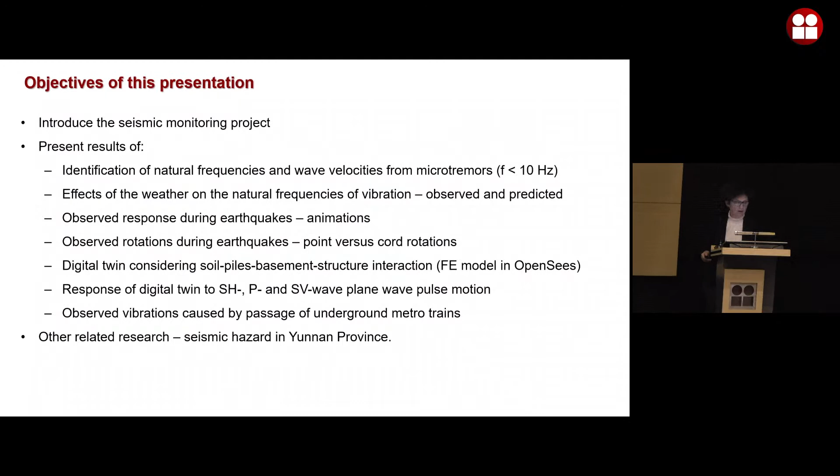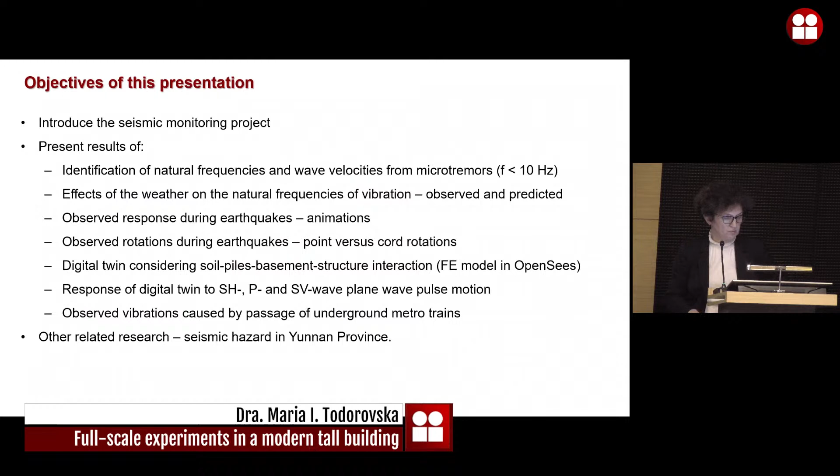First, I'm going to introduce the seismic monitoring project that I installed there, and then present results of different topics we've worked on using this data, or that were motivated by this full-scale observation site, such as identification of natural frequencies and wave velocities from microtremors, effects of weather on the natural frequency of vibration, observed and predicted effects, and observed response during earthquakes. I'll just show a few animations. Then observed rotations during earthquakes, focusing on point versus chord rotations, and then the digital twin that we made, which considers soil, piles, basement structure interaction. It's a finite element model in OpenSees. Then I will show a response of the digital twin to pulse wave motion at an angle, and discuss observed vibrations caused by passage of underground metro trains.

So first, introduction of the seismic monitoring project. It is a skyscraper located in Yunnan province, in its capital Kunming. It's a 50-story building with a 4-story basement, on pile foundation that reaches 50 meters deep. It's a concrete steel construction. Resistance to lateral forces is provided by an integrated system of concrete shear walls and columns connected to RC coupling beams.

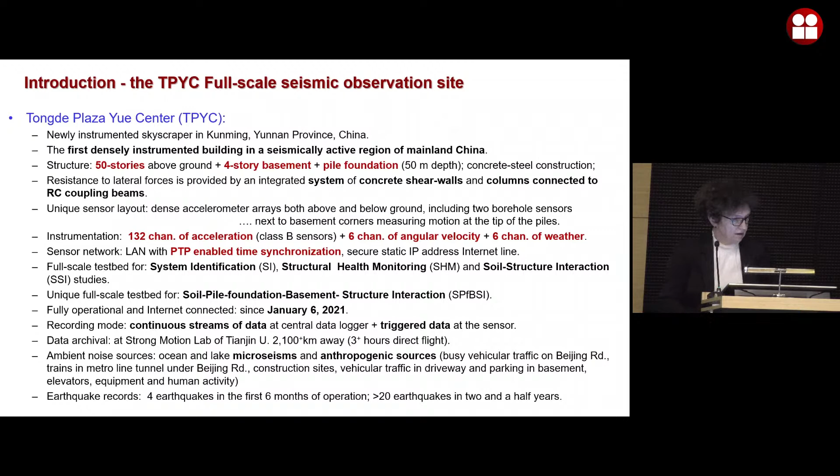There are 132 channels of acceleration. These are class B sensors, plus 6 channels of angular velocity - this is R2, an angular velocity meter - and a 6-channel weather station. Everything is connected. The purpose of this site was to provide data for research, so it has nothing to do with the government. The university provided the money for me to do this; it's totally separate from government projects. It's supposed to serve as a full-scale testbed for studies of soil structure interaction and structural health monitoring, and other studies. So let me show it.

We see here the map of China. My university is in Tianjin, very close to Beijing - it's a port city. And the building is located at the other end of China, diagonally, in Yunnan province, which bounds...

Okay, I'm trying to see that, but okay, maybe, yeah.

This slide shows the map of China. The green rectangle shows the location of the university where my lab is, and the red dot shows Kunming, where the observation site is, because there is high seismic activity. Yunnan province to the north is Sichuan, which is very seismically active. To the west is Burma, and it's in the diffuse zone of the collision of the Indian plate under the Eurasian plate, in a band with complex tectonic activity. I've been fortunate to record earthquakes already in about 2.5 years of observation.

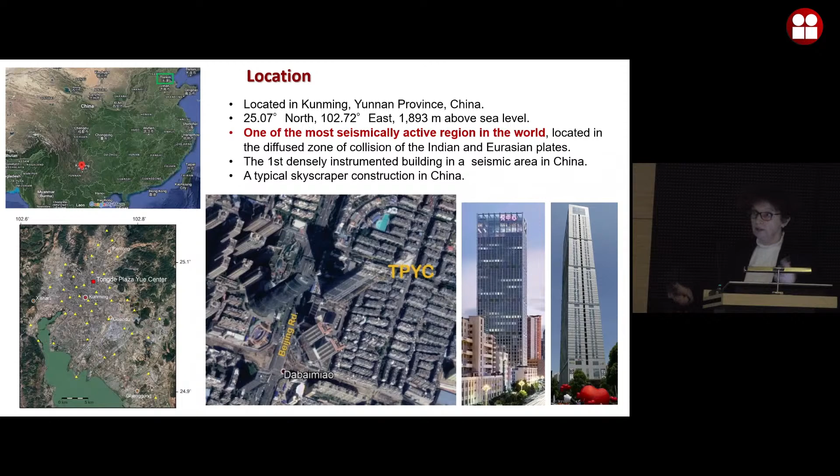This shows a map of Kunming, actually a part of Kunming. It is by a lake, and the triangles here are stations of the Yunnan Strong Motion Network. They have about 250 plus stations in Yunnan, and about 50 are in Kunming, which provides opportunity in future to study the arrival of waves that excite the building.

Okay, so this is a Google map. This is the building, and this is another building by the same owner. I have colleagues in the Yunnan Earthquake Agency, the local government agency that does everything, like the US Geological Survey in the United States. So they found a building for me. Oh my God, sorry about this.

Okay, so the building is pretty regular, rectangular, and detached, which is fortunate, because attachment of, let's say, shopping malls adds complication in the interpretation of the already complex real-life phenomena.

This here is Beijing Road, a busy street, under which there is a metro station, so there are a lot of vibrations from the traffic here, and also from the metro. Here is a metro station, maybe about 200 meters from the building, and the metro goes about 15, 20 meters from the basement of the structure.

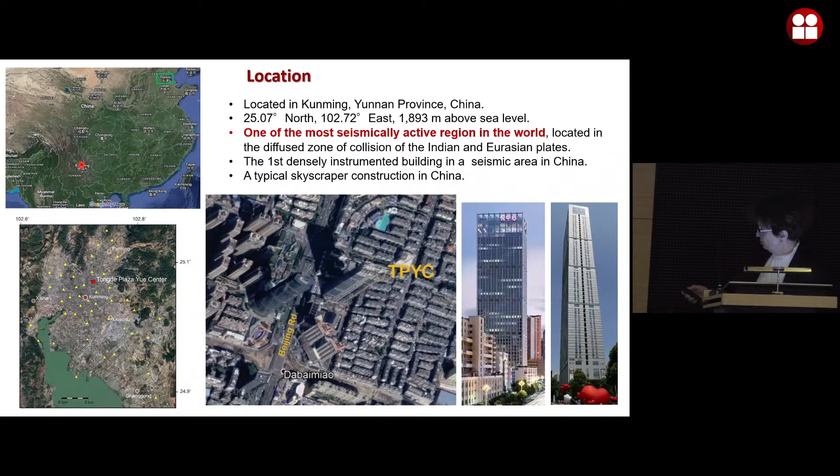Okay, so it has 50 stories, a 4-story basement, and piles. This shows the vertical elevation and the location of the sensors. The unique feature of this monitoring project is a dense instrumentation of the basement by triaxial accelerometers. We have 14 at 2 levels of the basement, and the purpose is to see how the basement and foundation deform, because the building is excited by seismic waves that go through the foundation to excite the building.

A unique feature, maybe even more rare, is 2 borehole arrays installed very near the basement, going down to a little bit less than 50 meters, where the tip of the pile foundation is.

Okay, so the sensors are triaxial class B MEMS accelerometers made by Canterbury Seismic Instruments, based in New Zealand. The angular velocity meters are R2 by eentec, a Lithuanian company, adapted to be compatible with the recording system so we get all data synchronized. The weather station is Vaisala, an industrial quality station made in Finland. So it's a truly international project, and we have a state-of-the-art network that...

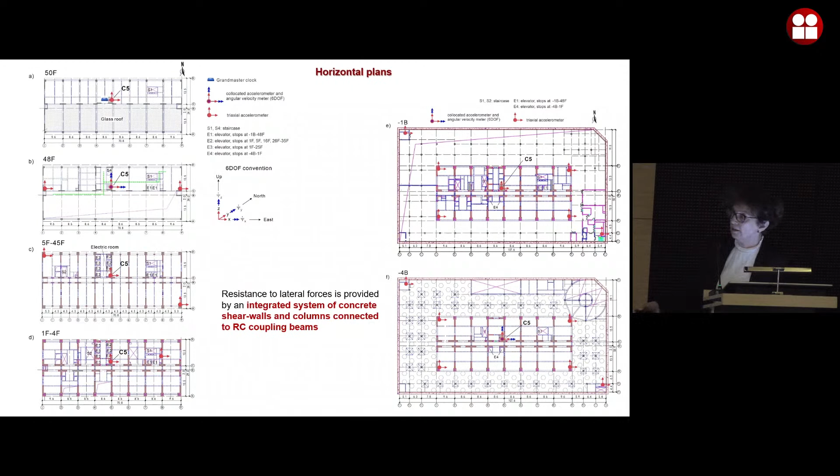So at every 10 floors we have sensors along the diagonal. These are refuge floors that belong to the owner. The rest is a business building, so floors have been sold to businesses, and we could only put instruments where the owner allows it, right?

At the other floors, in between, at every 5 floors, there is a sensor at some distance, not at the diagonal, so we can get torsion at every 5 floors.

And this is the configuration in the basement. So this is the tower, going from the 4th basement up, and it's surrounded by the basement proper, which is a more flexible structure.

Yeah, okay. So this here shows nicely the... oh my God, sorry.

Okay, so the borehole is about 8.9 meters from the foundation, and the other one is only about 1.7 meters from the basement. The metro is on this side, so we record the metro signal by the northwest borehole array.

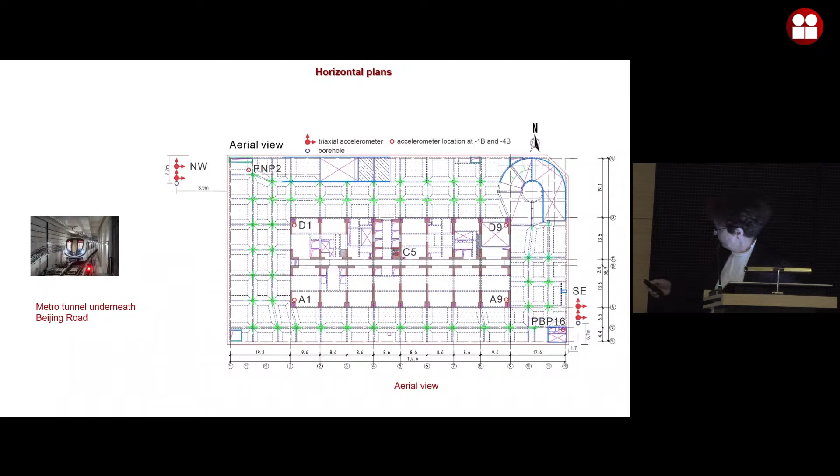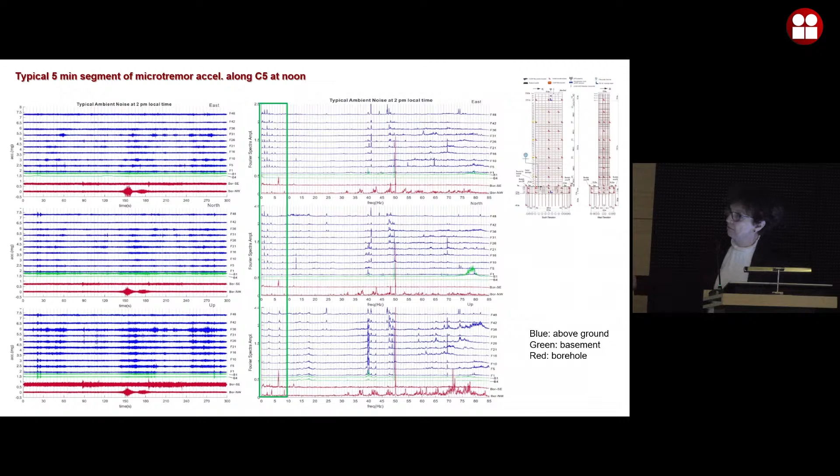And this is the Fourier spectrum. Up to 10 hertz, we see the modes of the structure in which it responds as a whole. Then we see other peaks between 35 and 50 hertz, and based on a model, these are vibrations of the slabs. We see other peaks there which we don't know what they are, some local vibrations.

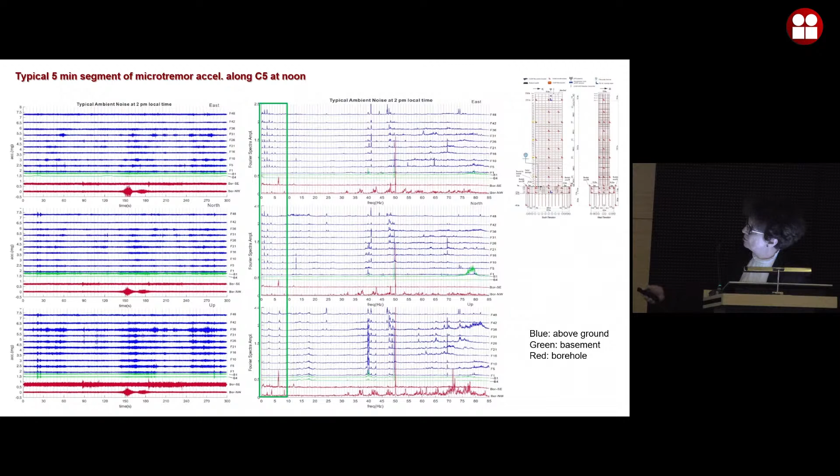This is the borehole on the other side of the building. We see frequency at about 2 hertz, 7 hertz, and we believe this is some construction site. This signal is the train. The train signal has equally spaced clusters of peaks, which are very intriguing. These are the 3 components: longitudinal, transverse, and vertical.

So now identification, first to see where our modes are, using microtremors. The origin of microtremors are microseisms caused by ocean waves in the Indian Ocean, and also by waves in Lake Dianchi, which is very close, the closest point to the shore being only 5 kilometers. These have been documented; seismologists have studied the microseisms caused by the lake. We also have very rich urban noise, as I mentioned.

Initially in November 2018, we did an ambient vibration survey using mobile sensors, ETNAs, that my colleague borrowed us. Then we identified the building again in 2021 using 1 hour of microtremor data stacked, and compared the results to see possible change due to deterioration of the building. My student made an ETABS model of the fixed base structure, which helped identify and interpret these modes.

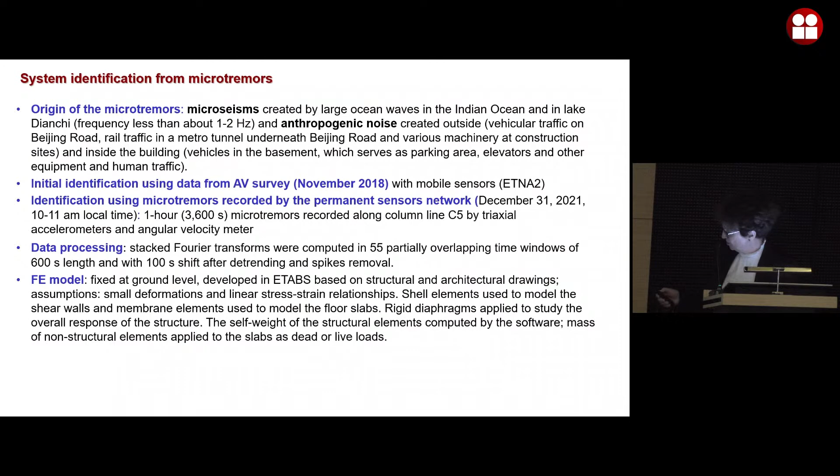So these are results of the 2018 survey or campaign, as they call it in Mexico. We recorded microtremors at all locations where we have sensors, but there was construction work in the building, so we could practically only use the record at the 48th floor and at the basement, which were quiet.

So we fitted a uniform Timoshenko beam, and what we see here are impulse responses obtained by deconvolution with the record at the 48th floor. One of the lines was obtained from the observed microtremors, and the other line is from the fitted model. These here are transfer functions, observed and of the fitted model.

From the ratio of frequency, we see that in the longitudinal direction the building is practically like a shear beam, while bending is considerable in the transverse direction. These are the torsional peaks as well. The Timoshenko beam model accounts both for bending deformation and shear deformation, and the wave propagation is dispersive.

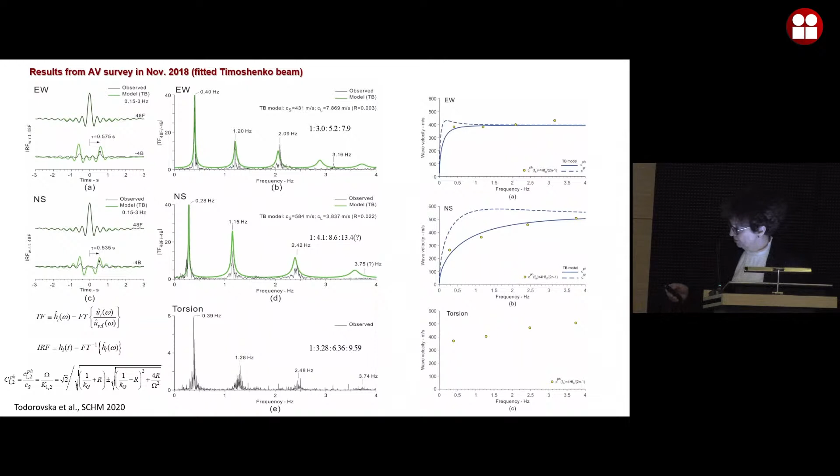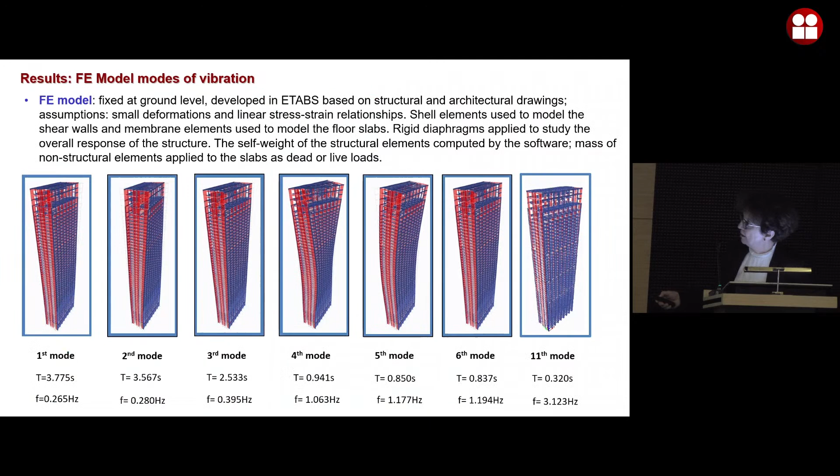Regardless of the noise, we compare with the model, and the model was very useful. We could identify the vertical frequency peak of the vertical motion near where the finite element model predicts it. These are the modes, so I'm just going to skip them.

You've seen many of them. These are RMS values and peak values recorded along this central line. We see that the boreholes are the busiest place, actually, down at 50 meters. And these are RMS values and peak values recorded by the two rotational sensors.

So we see that for the torsion only, we have amplification towards the roof caused by the building. Otherwise, we have larger motion at the boreholes, I mean in the basement, than we have at the roof.

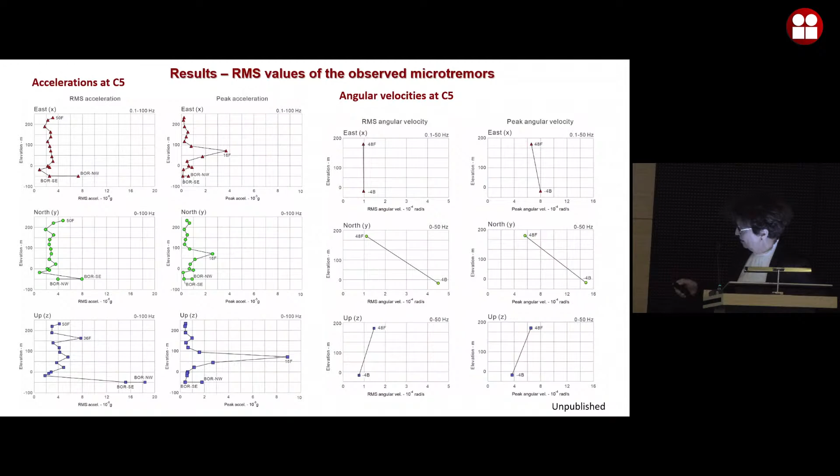These are Fourier spectra of the accelerations, x, y, z. X is longitudinal, y is transverse, and z is up, and these are the rotational sensors. We see clear peaks, even in the rotational sensors, and this peak corresponds to the lateral modes of vibration. And this is the torsion. We could see 3 torsional peaks, actually.

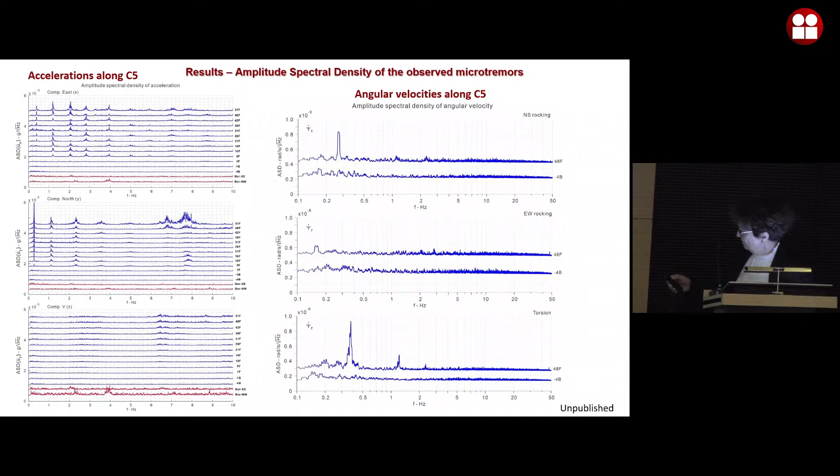These are the transfer functions in which we see clear peaks, and torsion is close to some of the lateral peaks. The torsional sensor helped us identify and separate the torsional motion. This is just first-hand interpretation and analysis.

We now use the stochastic subspace identification method to find the modes. These here are the vertical modes, and the vertical is very interesting because most buildings only have horizontal sensors, and if there are vertical sensors, they're only in the basement. We identified the first vertical mode at about 3.2 hertz. These are also vertical modes, quite prominent.

Why is this significant? Vertical motions are rarely even measured or considered in design. They have smaller amplitudes compared to horizontal motion, except near the earthquake. But that is true only sufficiently far from the earthquake. And another perception is that vertical frequencies are very high, where ground motion doesn't have much energy, but for such tall buildings, the fundamental vertical mode is at 3 hertz, which is where ground motion actually has energy.

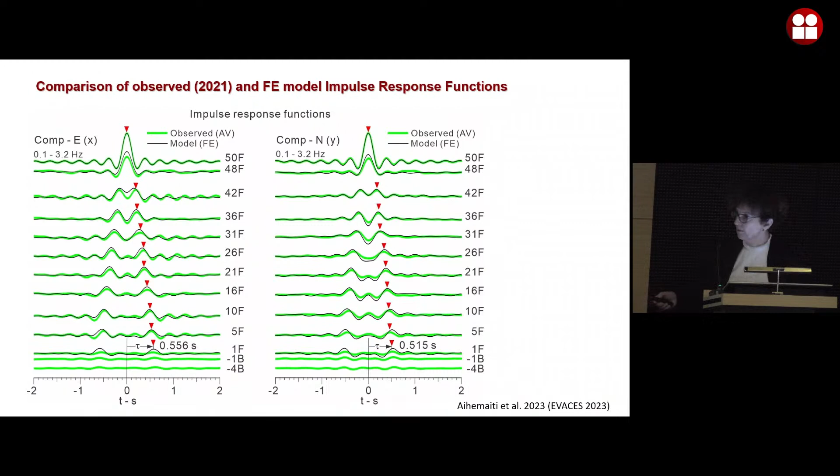This here shows the peaks, so I'm going to go fast. These are from 2021 data, the model impulse responses and the observed impulse responses. From 1 hour of ambient vibration data, we can get very nice shapes, and travel time is about half a second from roof to the ground.

Here we compare this with results measured in 2018, and we see up to about 2.5% difference. For the torsion, maybe there is inaccuracy in reading which contributes to these measurements. But these differences are of the order of magnitude of effects of weather, temperature, and effects of nonlinearity, recoverable nonlinearity, depending on the amplitude of the response.

So we decided to study these effects. The weather in Kunming is mild because it's at 25 degrees latitude, but it's at 1,900 meters altitude, so the summers are not very hot.

The summers are the wet season, it rains heavily, and it's one of the rare places I've been where one doesn't need air conditioning in July. In winter, temperature rarely drops below 0 centigrade. The springs have strong winds, and summers are very wet.

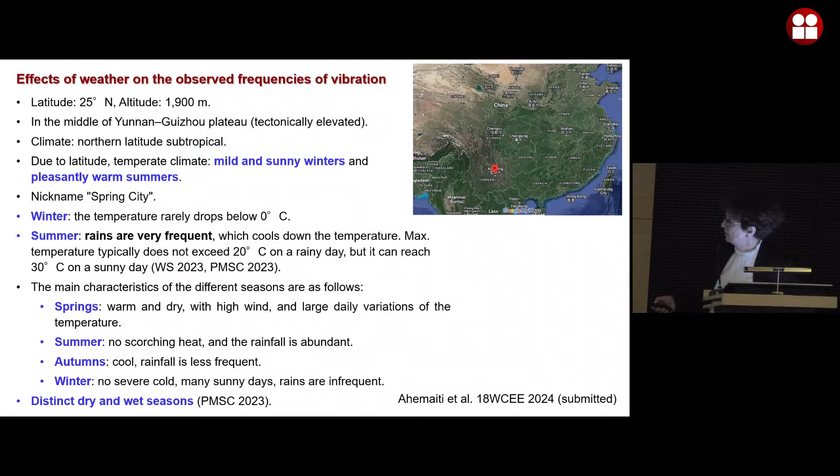So the climate is characterized by two distinct seasons, wet and dry. We believe that rainfall would have an effect on the frequencies of vibration. These are results from a paper that I just submitted for the World Conference next year.

We present preliminary results. We only analyze the east-west component in the first 4 modes. We use the stochastic subspace identification method to more precisely identify the frequencies, because we look for very small changes. We use data only from 2 sensors, simply to see first what we have, and then we'll do more detailed analysis.

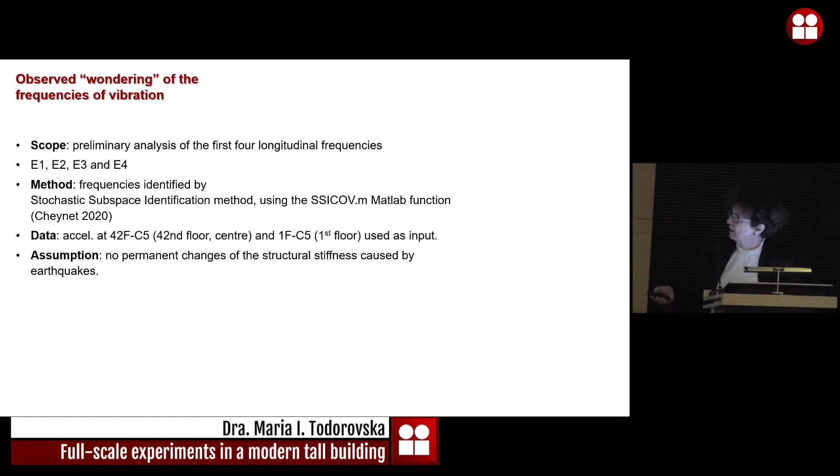There have been probably around 30 earthquakes recorded so far, 26 until last May, and 16 are kind of very nice records. But they were far; the largest one was a magnitude 6.4 at 300 kilometers.

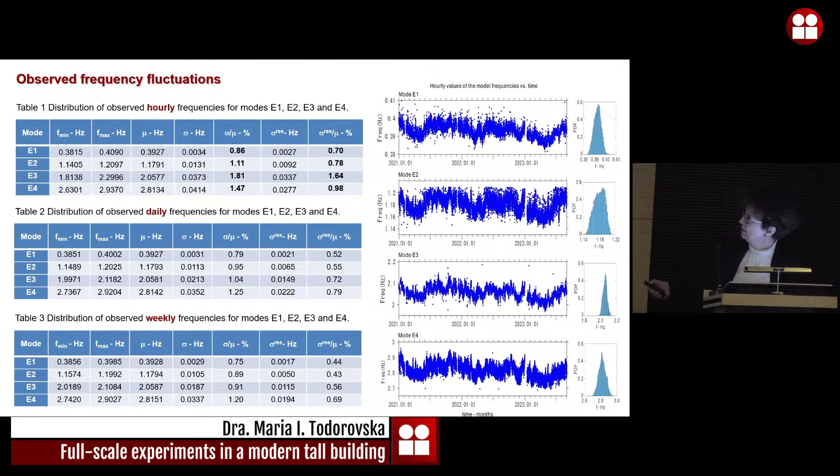So sigma over mu is the coefficient of variation of the observed values, and sigma residual over mu is the coefficient of variation of the residuals. We see the observation has about 1 to 2% variation, and the fitted model has less variation, so we do correct to some degree.

There are 3 tables because we did analysis for hourly values, daily values, and weekly values. The scatter is much smaller for the daily and weekly values. But if you want to take into account the effects during particular time of day, we need good prediction for the hourly effects.

So here we consider temperature, wind speed, absolute humidity which we get from the recorded relative humidity, and the rainfall intensity. These are the weather components that we consider.

Here we see the temperature, the RMS value of acceleration at the 42nd floor, then the wind speed, the humidity, and the rainfall intensity. Because wind speed is closely related to the RMS value, we use the wind speed.

Here we have a break in data after some storm. We were so focused on the boreholes and contacts that we forgot to monitor the health of the Vaisala station.

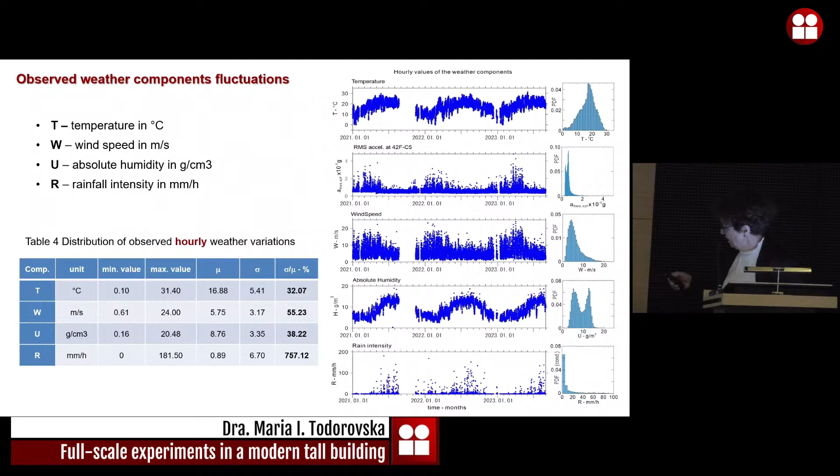So we fitted a linear model: constant term, wind speed linear, T is the temperature linear, so all linear. And we see the 3 tables are from hourly, daily, and weekly values.

We see here that the temperature coefficients are all negative, and by controlled experiments in narrow ranges of the weather parameters, we see that the frequency decays with temperature. This is very much dependent on the structure. Some have found increase of frequency with temperature, and this is for cracked structures. The hypothesis is that expansion of the concrete material closes the cracks and stiffens the structure. But this is a new building, and we see what could be expected from the properties of the material.

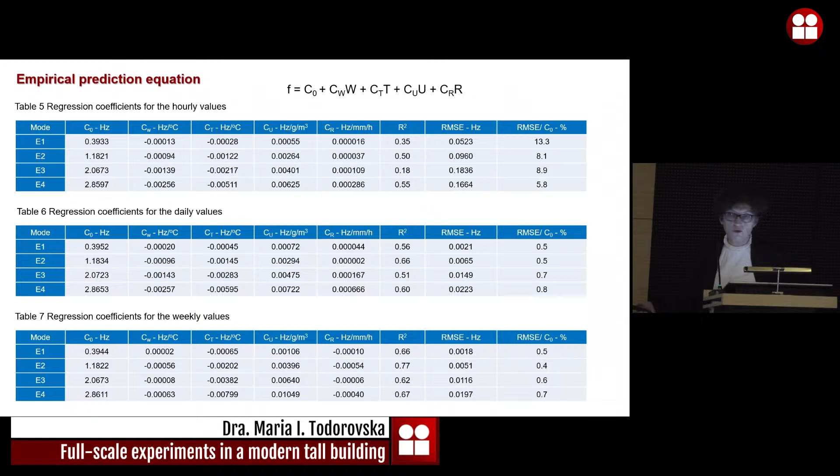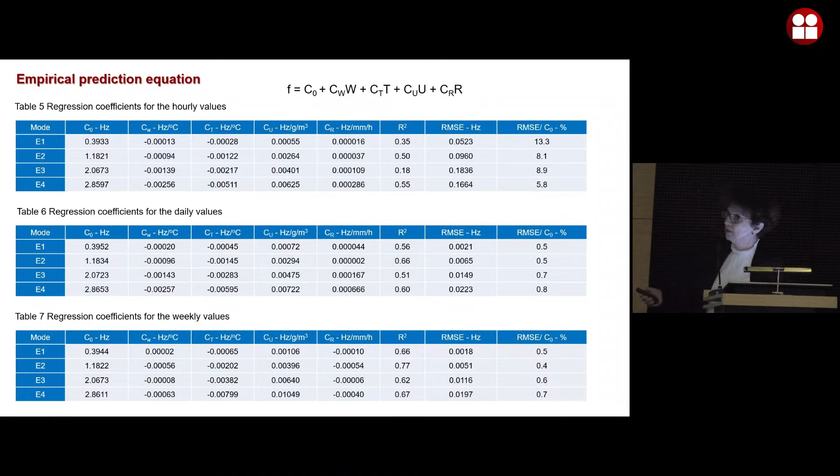The coefficients are positive for the rainfall and humidity. For the rainfall, there is a hypothesis that I have actually shown on a model that produces effects of the same magnitude as those observed in Millikan Library and other structures, which is increase of frequency by heavy rainfall caused by swelling of the soil, and could be explained by representing the soil as a fully saturated poroelastic material.

And we need to refine the model, maybe do some quadratic terms. We account for phase delay of the temperature effect, because we measure it outside, and it comes to be 20 hours, order of magnitude delay.

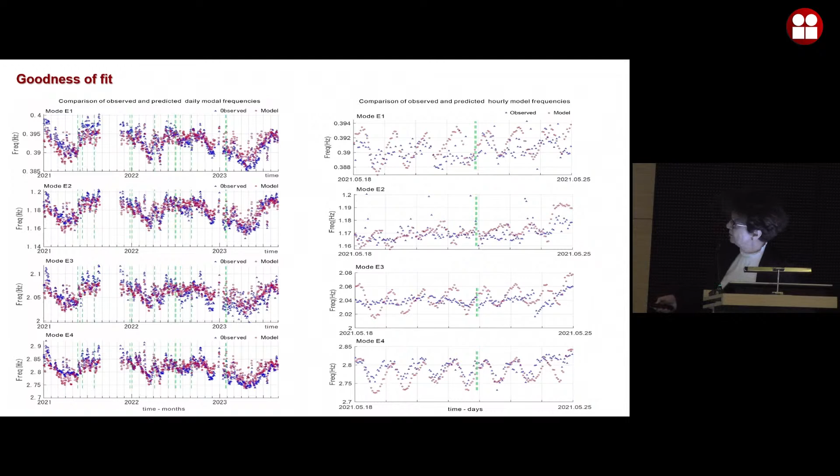These here are the daily values, and they don't look good except for the fourth mode. So for the fourth mode, with some refinement, I think we will be able to fit closely the observed variations, or to correct for the effects of the weather.

So we think that in future we can actually get better results to correct for these effects.

So why are these important? These are small changes, but if we want to use sensors to detect small, hidden, and localized damage, they would produce small changes. So we need to know first if these changes are due to the weather, or due to change of stiffness. The prediction of this effect will actually improve health monitoring using ambient data before the earthquake and ambient data after the earthquake.

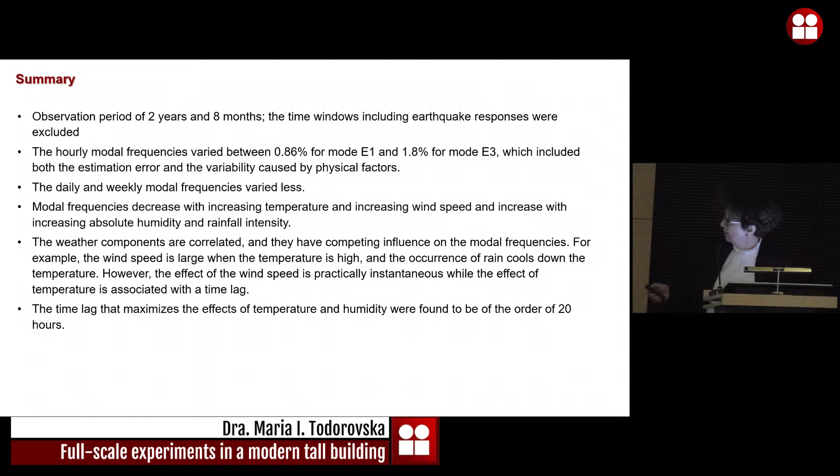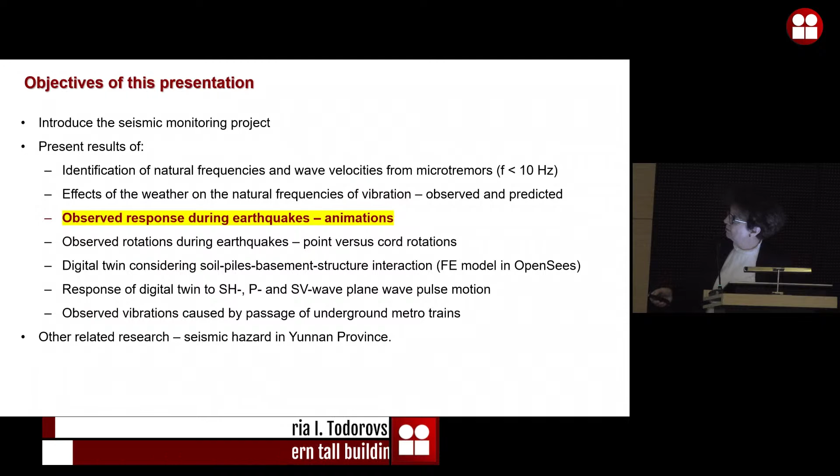Okay, so let's see what do we have. Changes are small in the prediction, which reduces the scatter. So now let's observe the response during earthquakes.

Okay, so let's see, I'm going to try. Now, how can I try?

Oh, my animation doesn't show. Anyone know how it can show? Yeah, this happened actually at a conference, and only some people knew how to solve it. No, it doesn't show. Okay, there is something. Let's see what to do.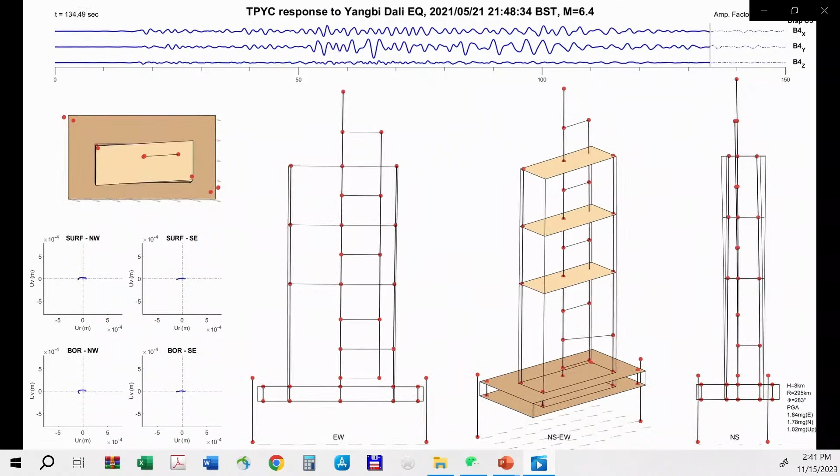Actually, there has been a magnitude 6.4 recorded not too far from the building. And the building is torsionally flexible. So the first torsional mode has lower frequency than the transverse mode. So a lot of torsion. And I think this is interesting that we see the building moving vertically as well.

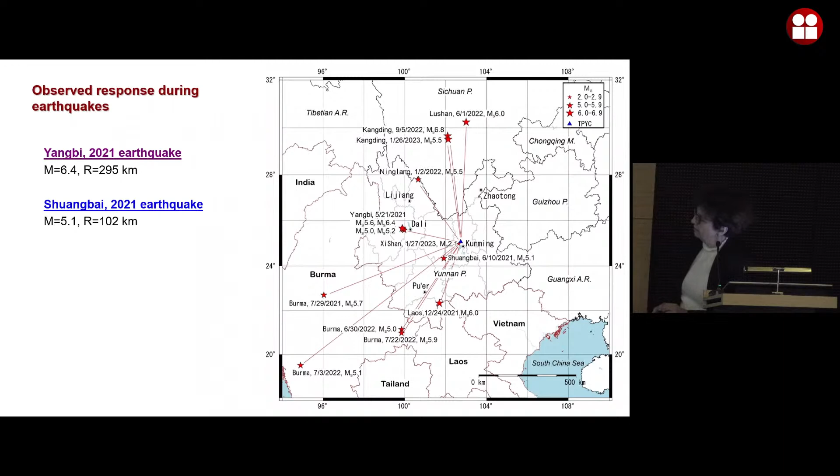Okay, so how do I get out of here? Oh, I have another one. So I want to run this one. Okay, double click on that one. No, just say yes, right? Okay, yeah.

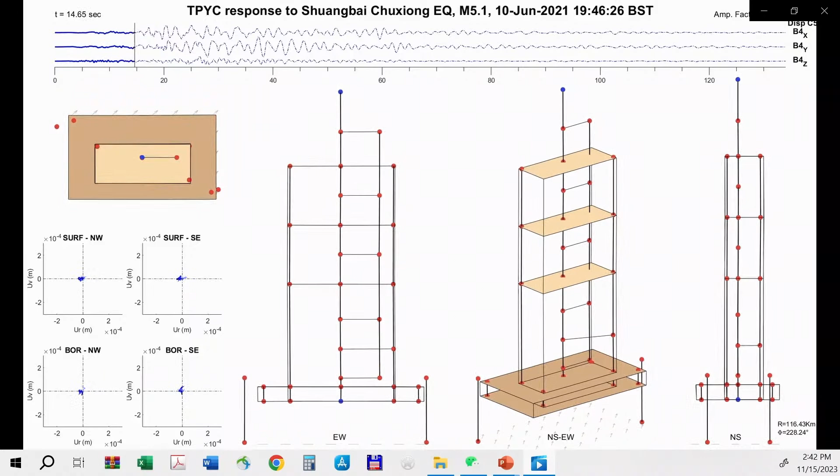Okay, so this is Shuangbai, 102 kilometers away, magnitude 5.1. This one has more high frequencies. And the arrows here show the direction of arrival of the waves.

And we have an earthquake at 10 kilometers epicentral distance, magnitude 2.1, beautiful signal. Vertical motion is back, the bottom. The bottom is the vertical, right? B4Z, this is in the basement, lower basement.

Okay, so can you please put it back? I think now it's not so interesting.

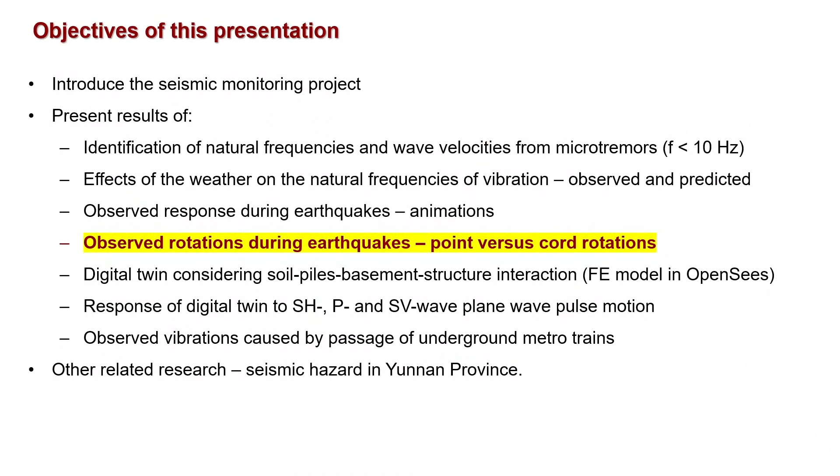Okay, so next is observed rotation during earthquakes. And this is from a paper, an invited paper for the keynote lecture of the rotational seismology and engineering application session at the World Conference of Earthquake Engineering next year.

Let's see. So motion of an infinitesimal element of soil is described fully by 6 degrees of freedom, described by 3 rotations and 3 translations. We record only the translations mostly because their magnitude is much larger than the rotations. But the rotations are not insignificant in the near field of an earthquake, and they may contribute actually to damage and maybe even collapse of a structure. So it's good to know what these motions are as excitation and then how they affect the structure.

And there is a working group on rotational seismology and engineering application, and Heiner Igel is the leader from the geophysics side. I'm a founding member, but haven't done much until now recently, that I have my own records. So they are not negligible in the near field of an earthquake, and there are papers of observed rotations. Our rotations are, of course, small.

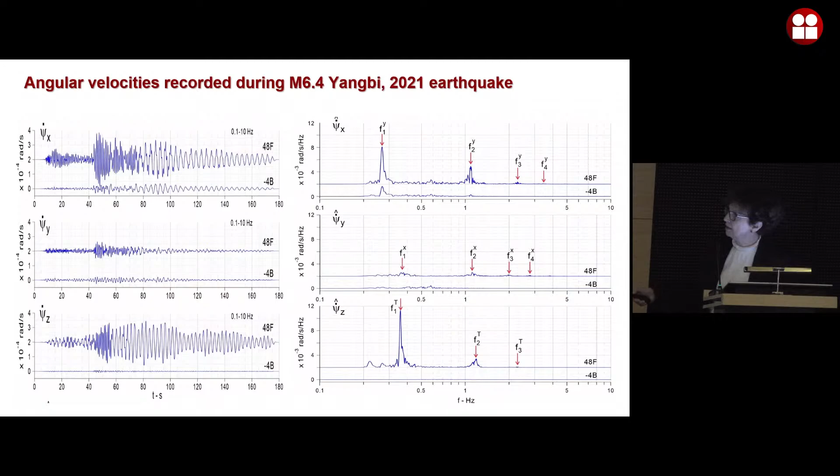So let's see, what do I have here? Okay, so these are the rotations in time. Psi X, these are rotational velocities as they are recorded, right? Instrument corrected. And at the 4th basement and at the 48th floor.

And this is the X component, which is the north-south rocking. And this is the east-west rocking, in which the building is stiffer and it behaves like a shear beam, while in this direction it behaves like a Timoshenko beam. So this motion here is the rotation of the floor slab, basically, because the building as a whole bends.

And it doesn't do that much in the other direction. And this here is the torsion, so we see large amplification actually of the torsion inside the building. And these are the modes of vibration, right, of the lateral motion.

And we see them also in the basement, right? The reason for this is the fact that the basement doesn't move as the soil, as the incident motion, but is affected by the response of the structure, and the mechanism is the soil structure interaction. So we see these peaks in the basement motion. We don't see it as the torsion, so the input torsion is really small, but the rocking actually is more significant. And this is the Yangbi earthquake, magnitude 6.4, that produced the largest response.

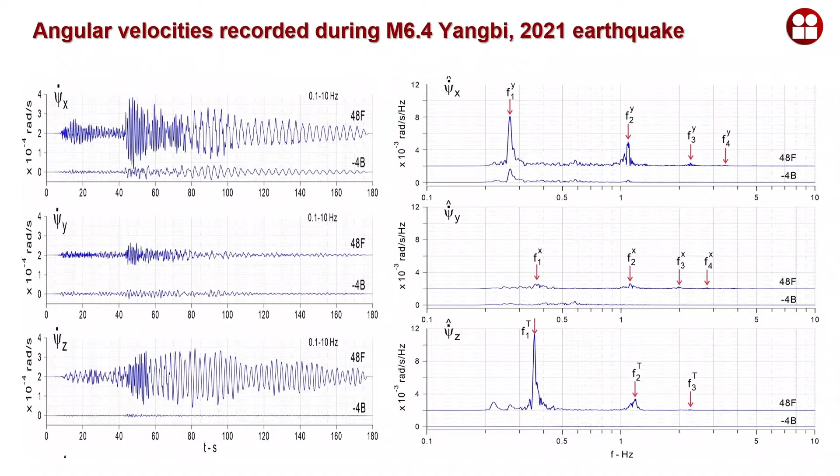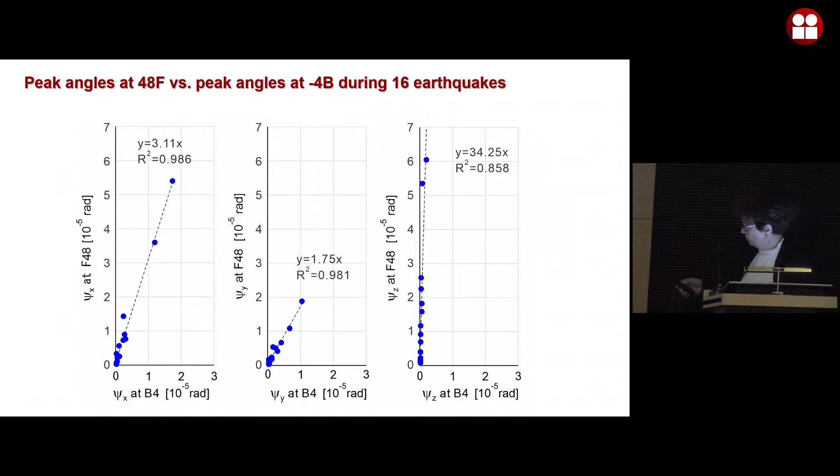And we see this linear trend as observed by seismologists. And this here shows the correlation of the motion at the roof, 48th floor, and at the basement. And we see kind of linear correlation. And we see very large amplification for the torsional motion because this is a torsionally flexible structure.

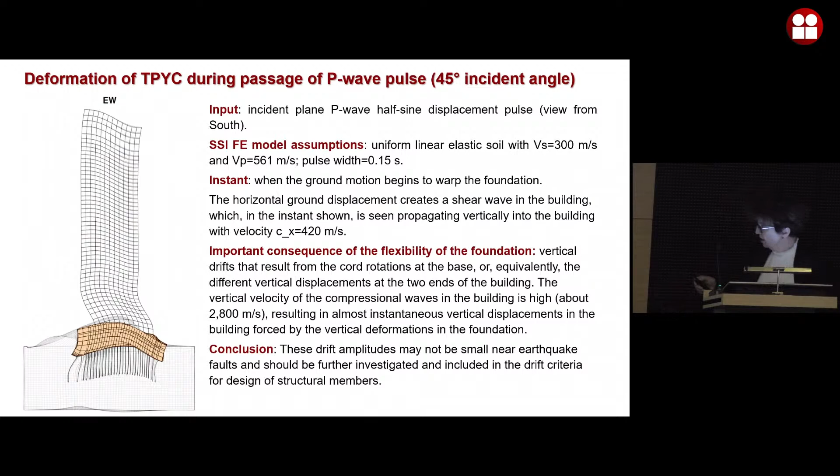So that's about it. Next, digital twin.

My very able student made a finite element model of the soil, 540 meters by 300 meters and 100 meters depth. We have boreholes up to 100 meters at 29 locations just under the building and around the building, so we have a site-specific profile of the soil up to 100 meters depth. I have no idea what's underneath.

So every pile is modeled separately. We consider two variants, one with bond contact and one with friction contact. Friction contact only works on pressure - soil works only on pressure and not in tension. And friction provides a constitutive law of the relative motion of the soil in the structure.

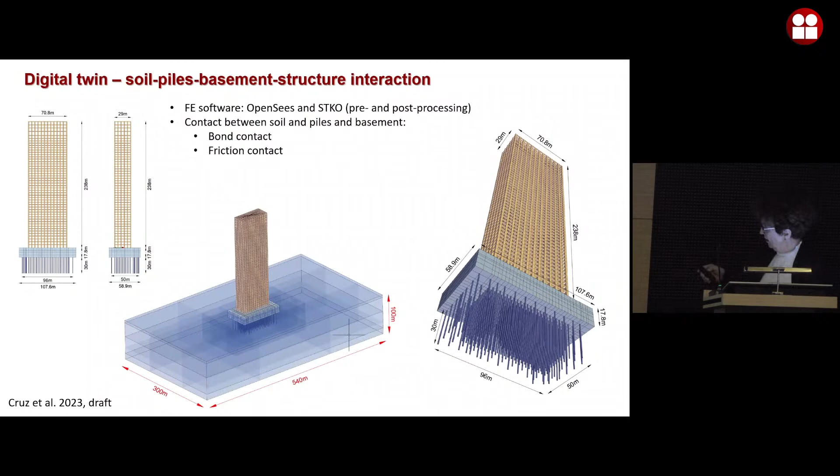So we have results for both models. I got a project to study the role of flexibility of foundation in the response of tall buildings. So my student made models: one fixed basement, another with no piles and flexible foundation, no piles and rigid foundation - this is the assumption in boundary element models, right, rigid foundation and no piles - and then flexible foundation with no piles, and then the full model, which is flexible foundation on piles.

This here shows a plot of how the fundamental frequency changes. This is for the bond contact, and this is for the friction contact, so much more reduction actually for the friction contact. And this here is the full model, at the end.

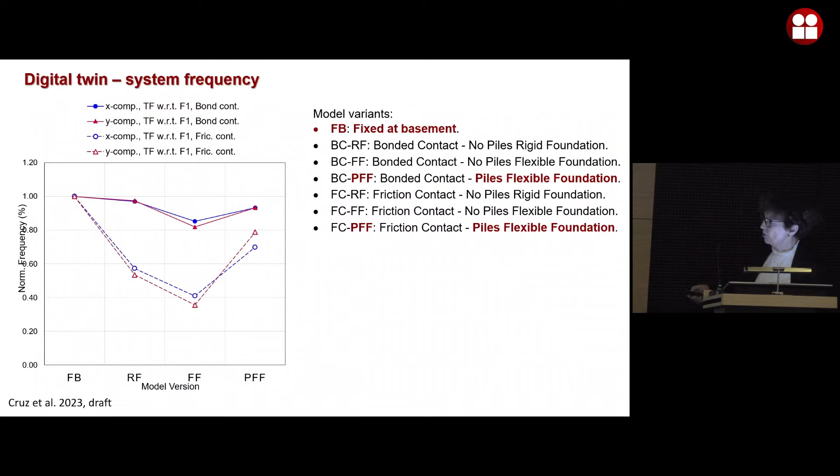So we see about 14% reduction, actually, we account for caused by soil structure interaction. This here is the damping - the damping increases due to the soil. And this here is drifts.

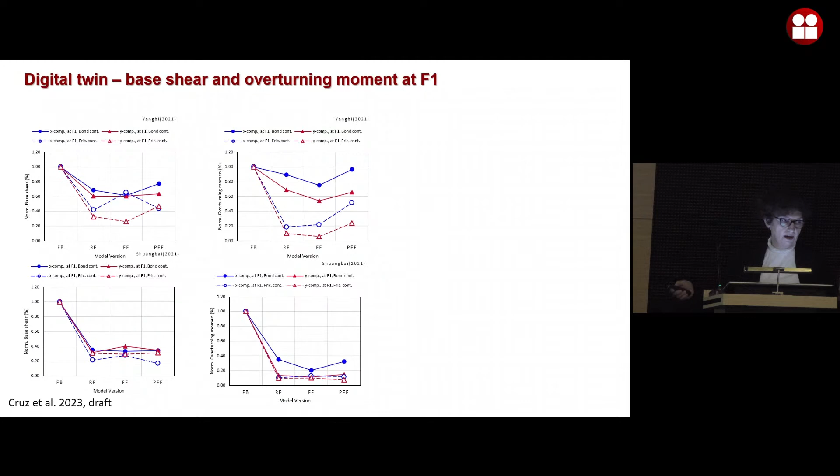I'm going to go fast because I have many slides. This here is the base shear and overturning moment. So basically the idea here is to see how the response depends on our assumptions in the model.

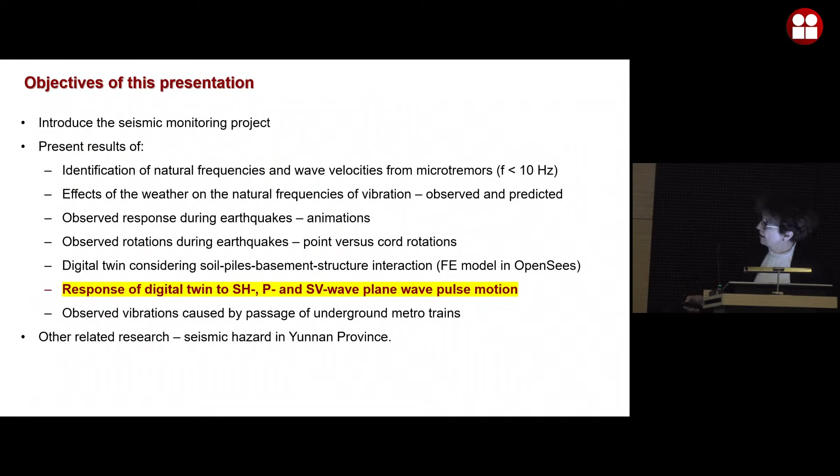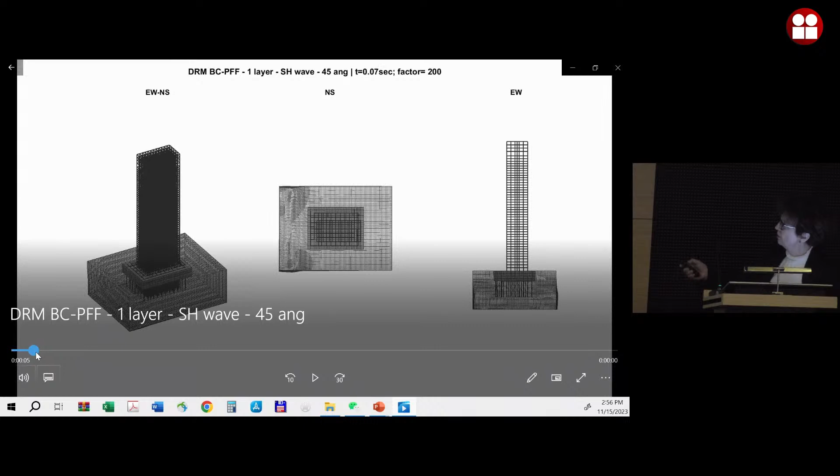So the building is excited by a half sine wave pulse arriving at 45 degrees. First, yeah, the first one, then second and third. Oh, so I cannot control - or I can control here, the cursor - to go slowly. Okay, so you can slide it slowly.

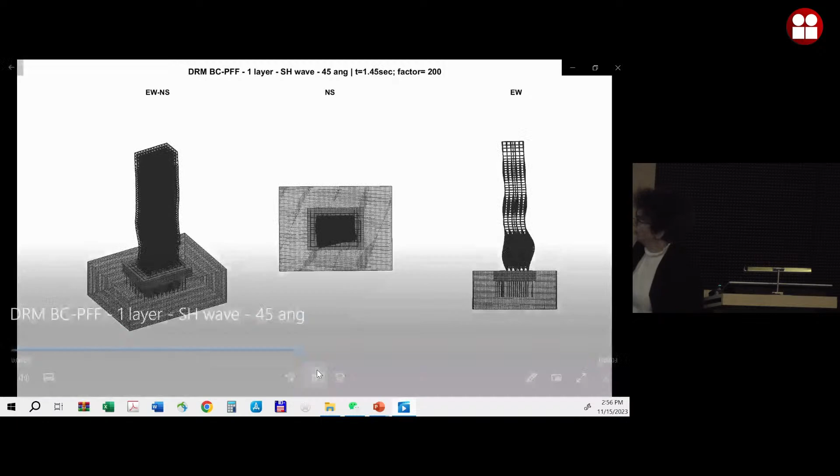So this is an SH wave. Just slide the time from the left. No, he can't see it - it's such an angle. Okay, yeah. So the pulse goes very quickly, but the building vibrates long after the pulse is gone. And this kind of motion excites the torsion.

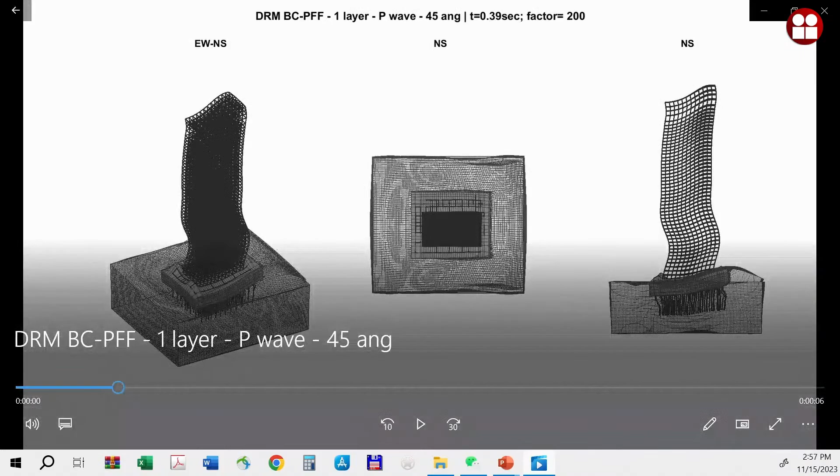Now the second one. The second is a P wave, so it imposes vertical displacements and also horizontal displacements, okay, and it actually warps the foundation. So that was a snapshot from this kind of motion.

Okay, so we can see actually, if this goes slowly, how the wave goes up, reflects, goes down, and then bounces back and forth. This is P wave? That was P wave. Would you like to see it again? Yes, please. Okay, so the P wave, and I can slide it slowly since I can see it there.

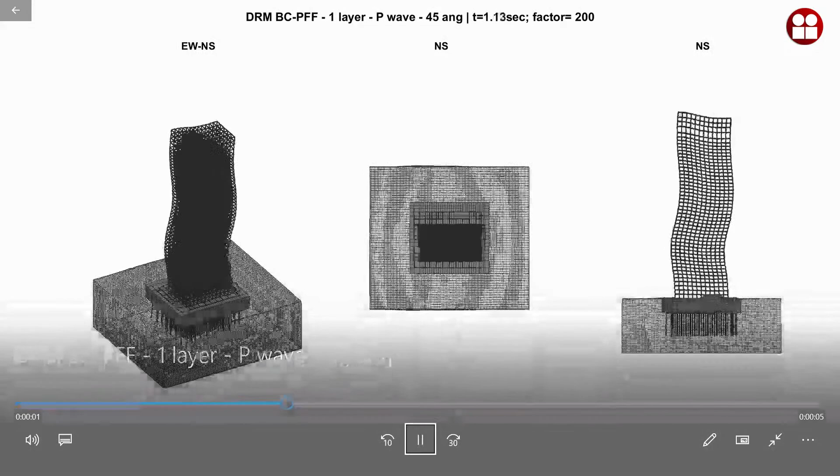You can use actually even the cursor. And my student wrote a MATLAB code that actually plots this rather than using commercial post-processing software, and he can edit them. The files are much smaller. So he's a very, very able student for computation and technology.

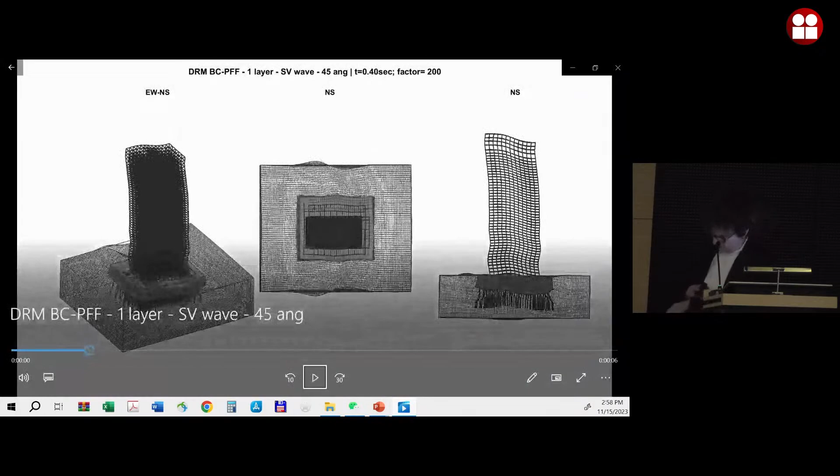Okay, shall we do the SV? Okay, and I can show it to you after, Paco. Who is interested? Okay, so 5 o'clock. Okay, so this is the SV wave, but I think that the P wave is actually kind of neat. And this could be a pulse of near field ground motion, right, very near the earthquake.

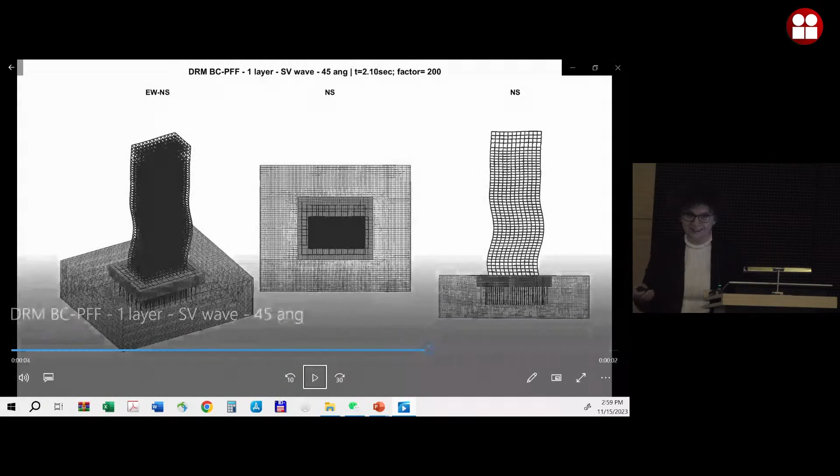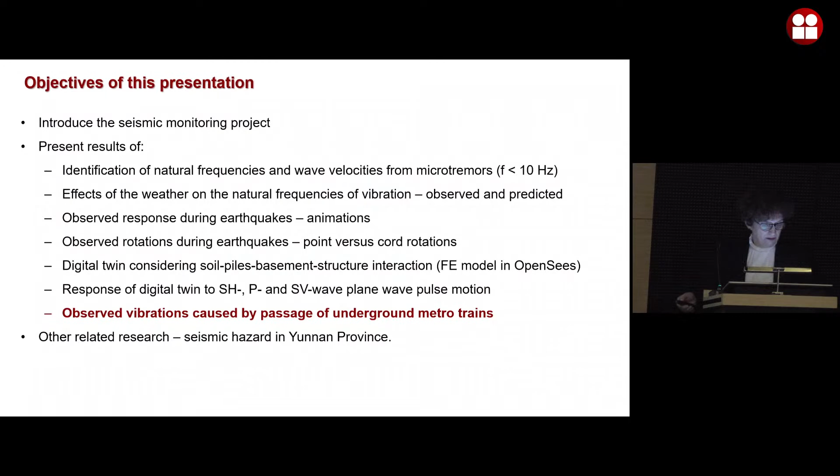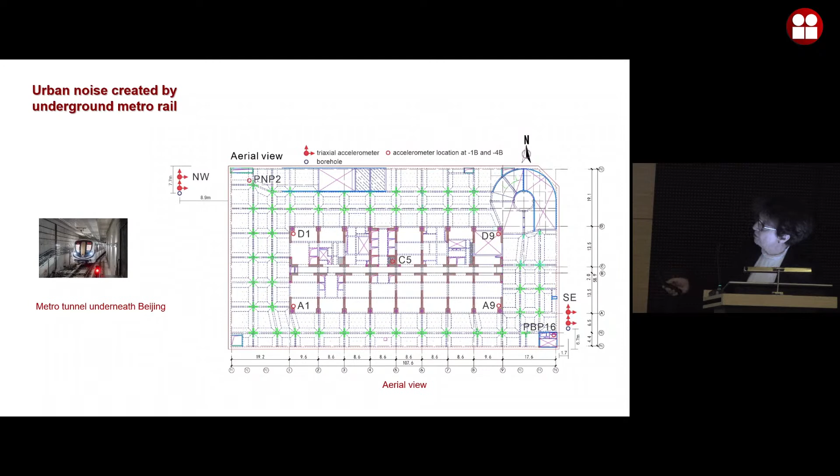So what is this? Okay, now observed vibrations caused by the passage of underground metro trains. As I mentioned before, the metro goes under Beijing Road, and our borehole is very, very near, actually. We don't know exactly where it goes, but supposedly it goes in the middle. This is again the location of the sensors where we see the train passage.

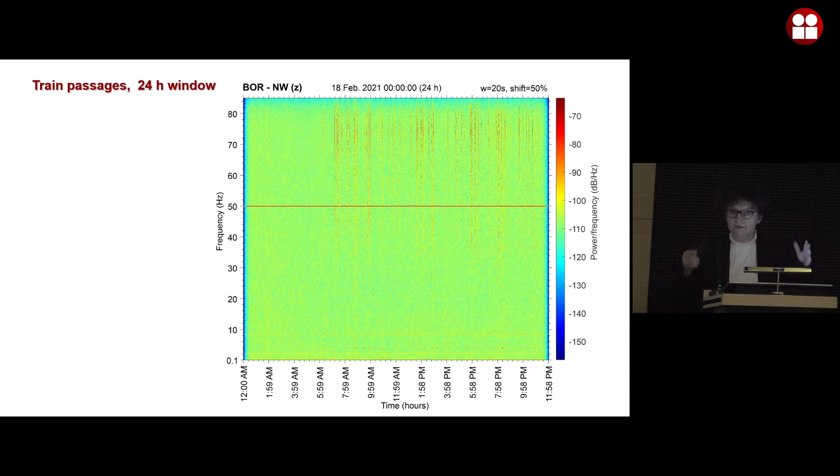This here is a time frequency plot over a 24-hour period. We see the train comes at about 6 o'clock, 6:30. Because China is one time zone, people in the western part actually start their life 2 hours later than the people in the east. So this is very early, even 7. People go to work at 9.

Okay, so these lines are actually passage of trains. And we see these are not continuous lines, and that's because the spectrum has very peculiar peaks. And this here is the 50 hertz frequency that the borehole sensors pick up.

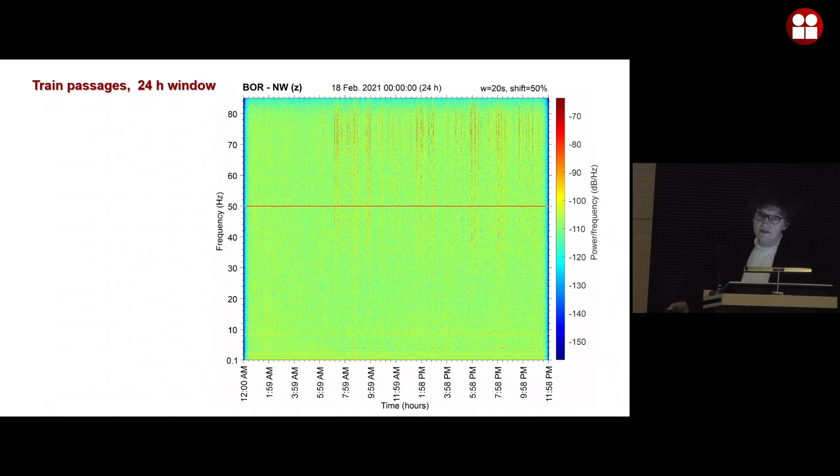Underground is a very busy place with lines because of the metro, etc. This is 24 hours, so we see weak lines and strong lines. The weak lines are the slowing down metro, because there is less force exerted by the wheels, so it's a weaker line, and the strong lines are the accelerating train. So the frequency is really between 35 hertz and up, and this here is the borehole.

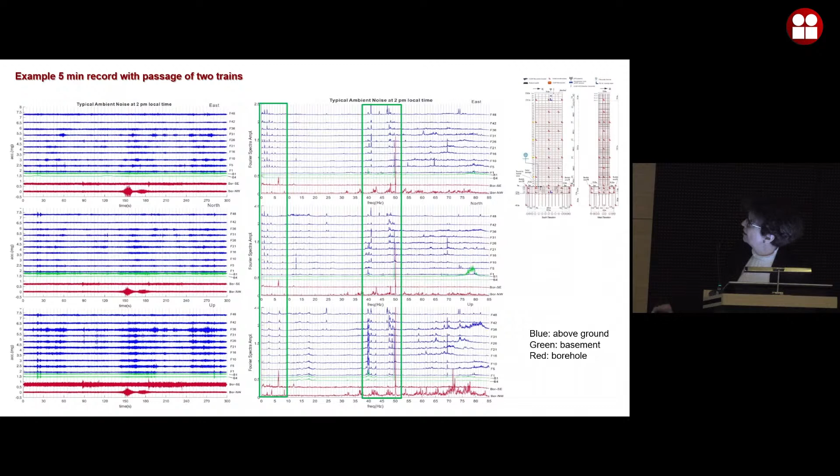the array became operational. So we see here that the slab vibration is actually similar frequencies as the train. And at the borehole, it's very close to that slab where vehicles go around the building. So it records these vibrations as well.

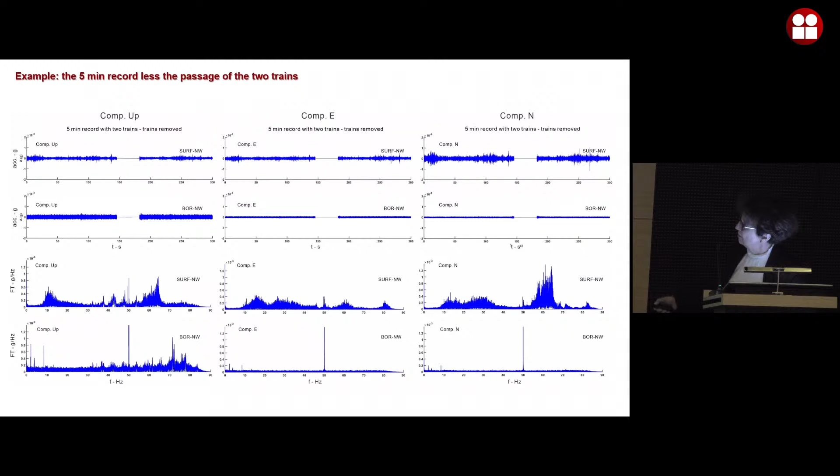Okay, so this here is the combined signal. Two trains, the top is on the surface, right? And the bottom one is at the borehole. So we see the two trains, the whole signal, everything. And we see much larger amplitudes near the surface. This here is that 5-minute record, less the passage of the two trains. We still see large motion, okay. And this here is the passage of the accelerating train.

So this is the vertical, which is actually of primary concern, but sometimes it's useful to look at the horizontal ones. At the borehole, the vertical has the largest amplitude, larger than the horizontal ones, but at the surface, the horizontal ones have larger amplitude because of the amplification near the surface, the free surface effect.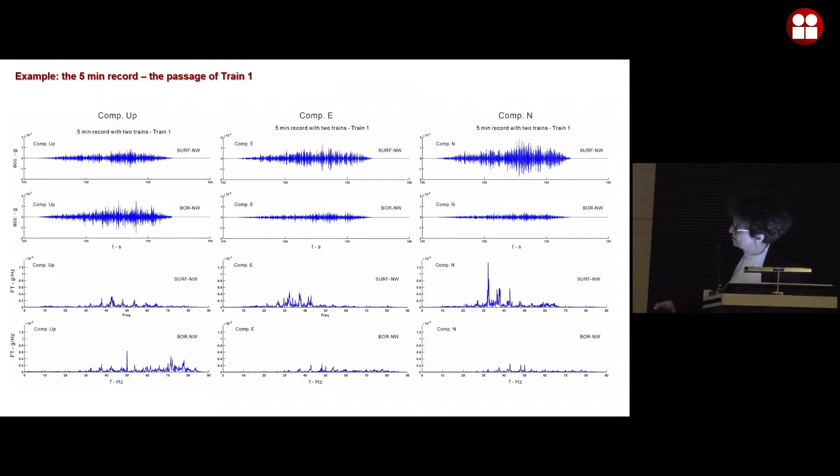And these here are the peaks. We see like equally spaced clusters of peaks, okay, which are intriguing. And this is a record in the borehole at the corner, which kind of filters nicely these high frequencies, so we can measure the clusters nicely. So these large peaks are exactly at 5.2 hertz. There are smaller peaks at about 2.6 hertz, I believe. So there are different kinds, I think these are different superimposed effects.

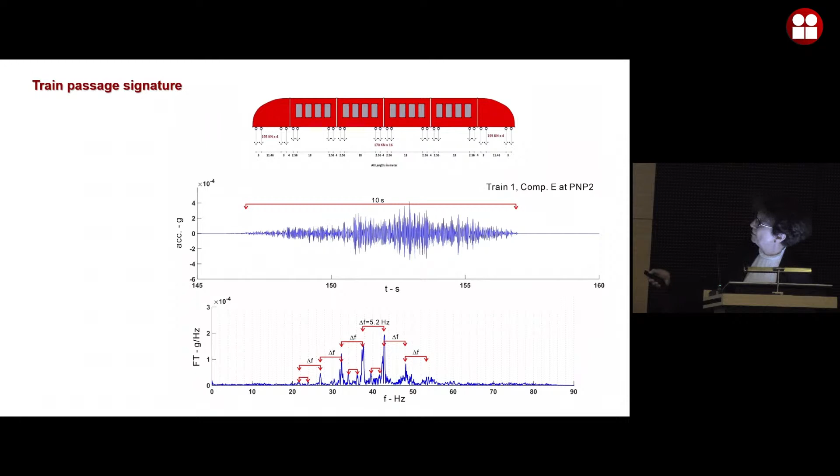And what causes this? The 5.2 hertz can be explained by the action of this bogie. So each car, these are passenger cars, has two bogies in front and in the back, and every bogie has two axles and a pair of wheels, right? So the action in time of the passage of these two wheels can be explained by this frequency. And the other frequency, the smaller distance, by, I think, maybe this pair of bogies.

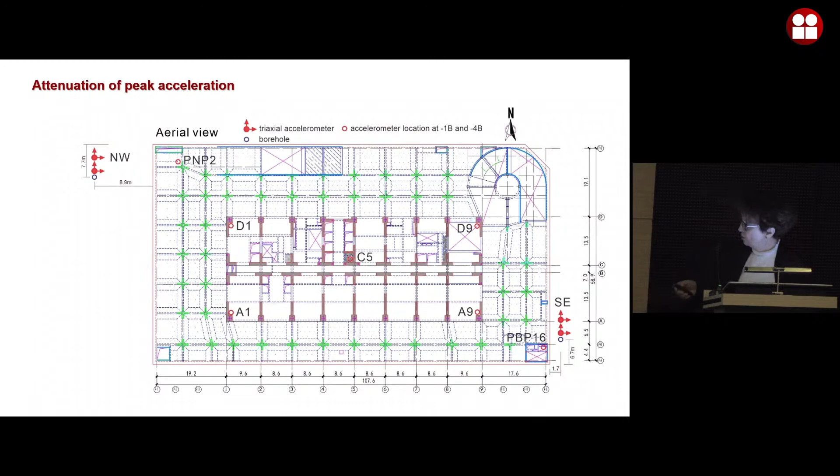So my student made a model, actually, to try to explain these peaks. And actually, he was in love with seismic metamaterials, and he came to study that with me. And I just told him, these seismic metamaterials are not going to work for waves coming vertically. For earthquakes it's a very nice problem, but the effectiveness is really limited to horizontally propagating waves. But for trains, actually for train traffic, they would work because these are high frequency waves, and the source is near the surface. So he put barriers as well, but I didn't put the results here to show them.

So this here shows the attenuation with distance relative to the surface sensor, because we don't know exactly what is at the metro or even exactly how far it is. So we see it attenuates very rapidly. This is the normal distance from this borehole. So we see the first point, second, third, fourth, fifth sensor, these are along the X direction. We see it attenuate very rapidly in the basement. And of course, this is just a metro train. For high-speed trains, these are large forces felt at 300 meters.

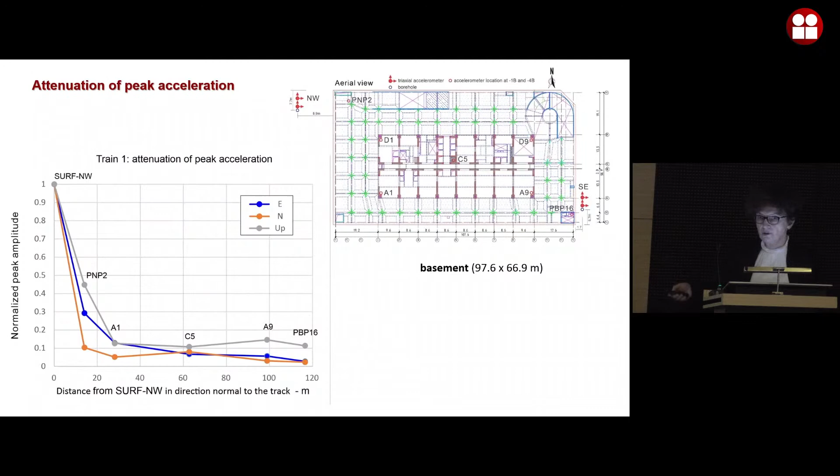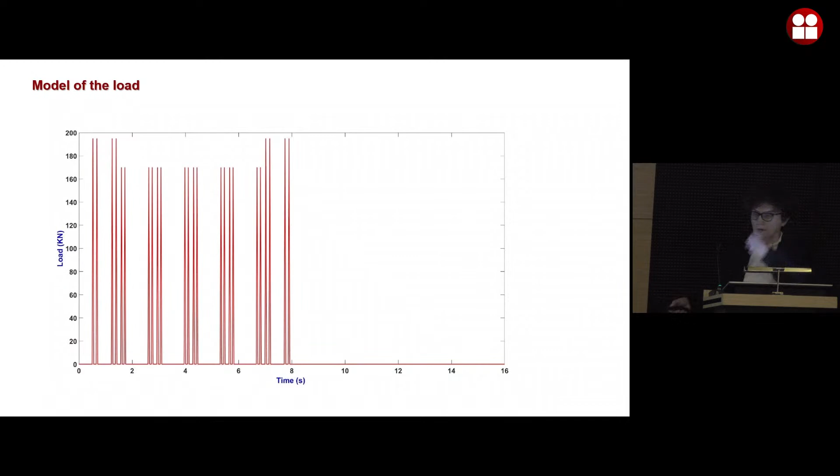So this is the train signal. The passage of each wheel is modeled as a triangular signal, and there are 3 passenger cars with engine cars at both ends.

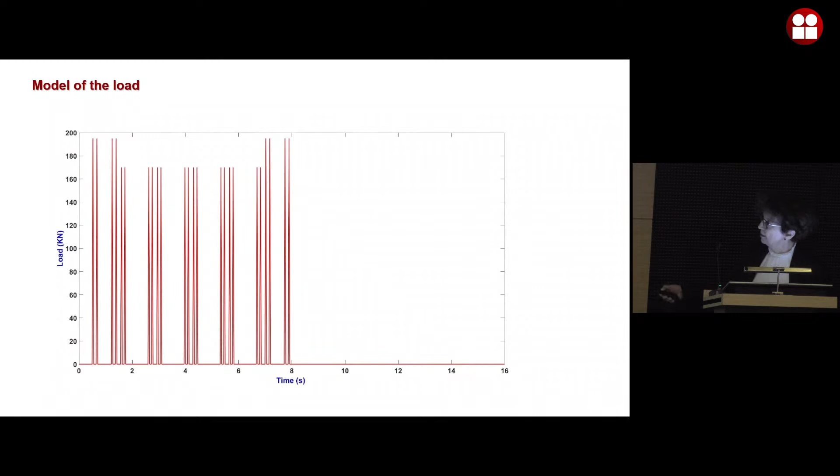There are also dynamic forces due to the sleeper, and we need to learn actually about it. It's a whole profession that studies this. He used the model only for the quasi-static force exerted by the weight of the wheel, which is a moving load with certain action.

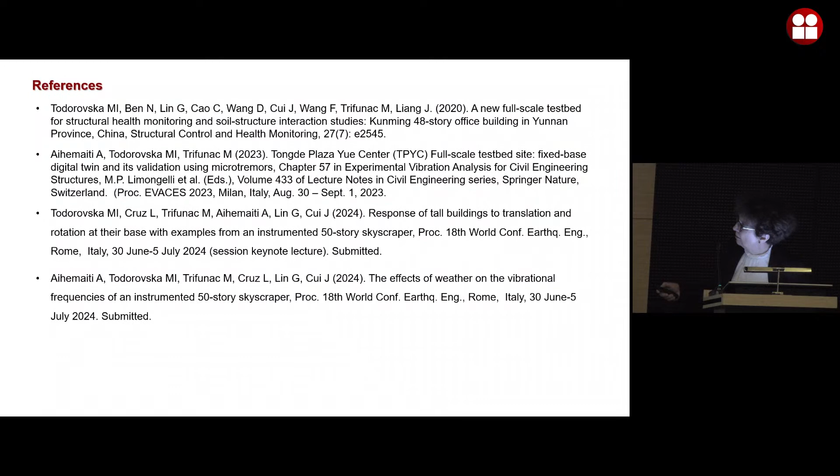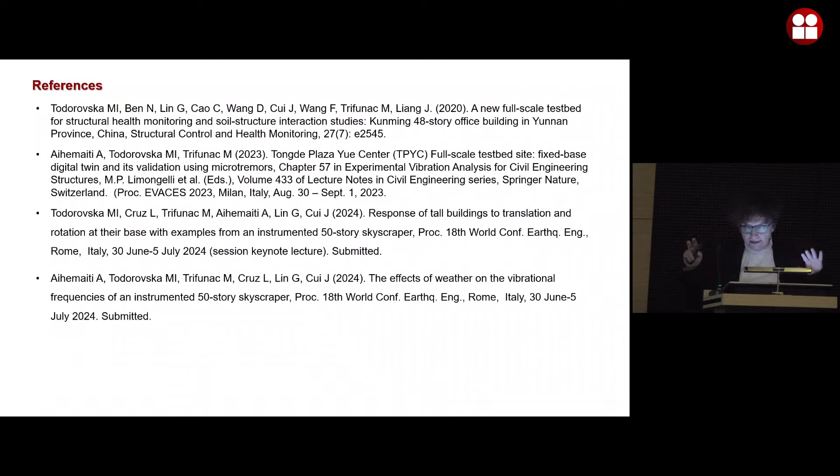Another topic that I work on is seismic hazard. I got records from 2008 to 2018, recorded by the Yunnan Strong Motion Network. We've studied with the student the source parameters, the attenuation of spectra and peak values, and now duration. I have another student doing a master's thesis on duration, and a PhD student who would eventually do hazard, hopefully.

That's my full-scale laboratory from Los Angeles. I moved it to Yunnan. Thank you.

Maria, very nice. Congratulations for such a nice account of your experience with this Yunnan building. It's magnificent work with a lot of data. I was wondering, how do you handle all this information, thanks to your students?

I have a few questions. Have you an assessment of how much it cost to make the experiment? You mean the budget for the deployment? Deployment and students' budget, I mean, many salaries.

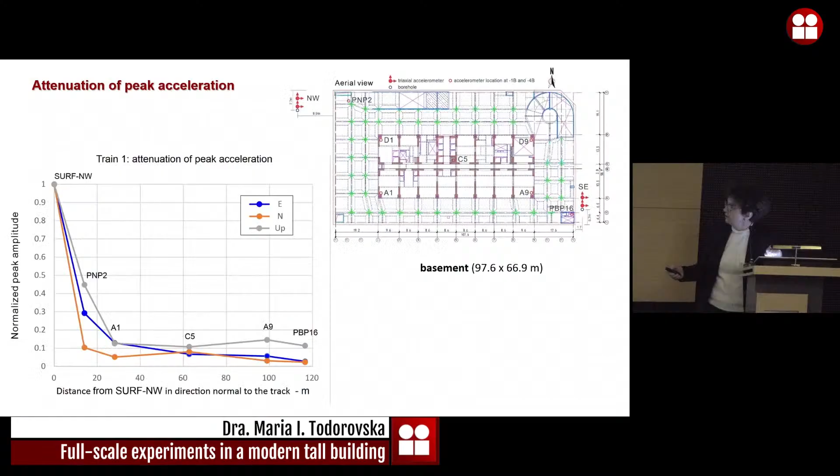Thank you very much, Maria, for your talk. We finally appreciate you coming back to the Institute, to the Instituto de Ingeniería, it's an honor to have your presence here. Thank you for your interest, staying to the end. Thank you, Marco. Oh my goodness. Or the diploma, certificate, thank you very much.